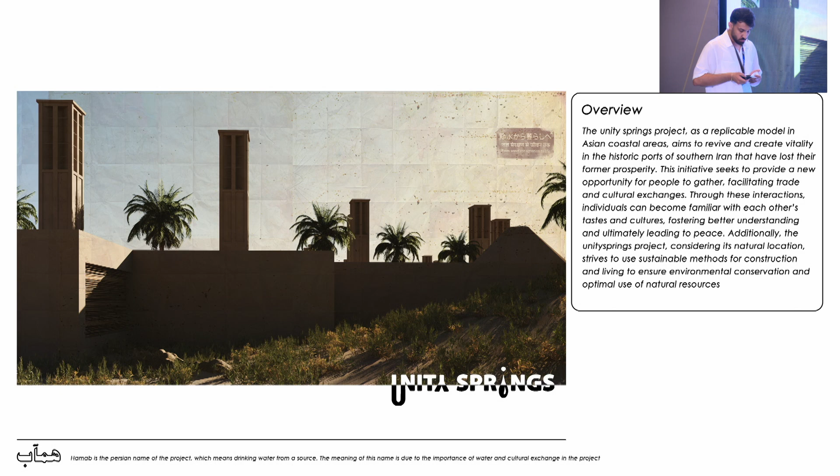The first part of my project: let's consider the issues, the story of the area, and the marine communication and concepts. In the past, roads had an important role in the exchange of culture. In this project, I will talk about marine communication and how it used the spice road.

This project is located between two historical port cities dating back to 3,000 years ago, Kong and Lenge, in south of Iran. In fact, our limited design is attached to Kong port.

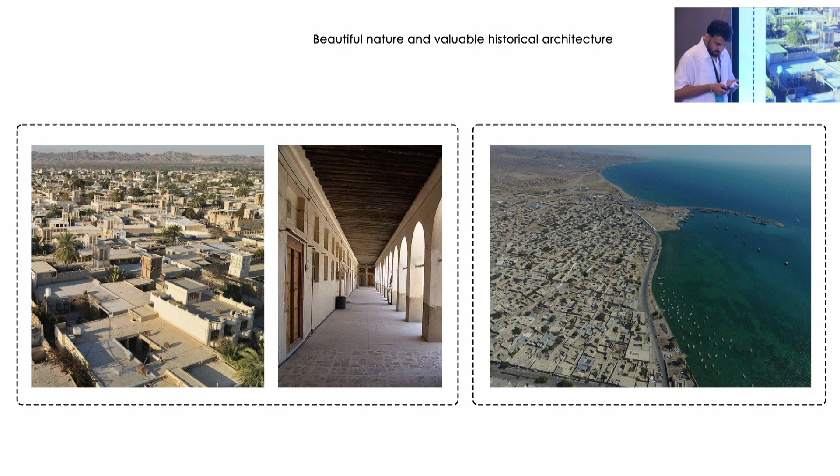In the city of Kong, there is a beautiful nature and unique historical architecture, especially in the field of sustainable methods. In the Kong port, there was a trip named Gap.

This is a Persian name, and this trip was taken by sailors on the spice road. This trip has had many effects on the culture, art, food, and literature of some countries that have been on the path of this trip.

The countries include Iran, India, Arab lands, and some parts of Africa. For instance, the spice taken from India affected the food and taste of other areas, and marriages between nations such as Iranian and Zanzibar people and Indians in south of Iran took place in many cases to exchange culture and traditions.

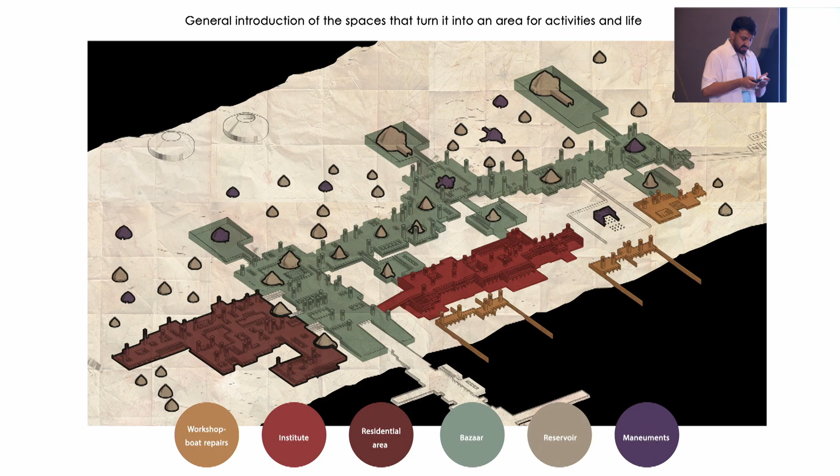In this part, I will describe all the spaces in this project. In this form, each space is indicated separately, and these spaces include specific uses such as bazaar, living space, reservoirs, institute, and workshops.

This is the overall view of my project, and here I'm going to explain each part.

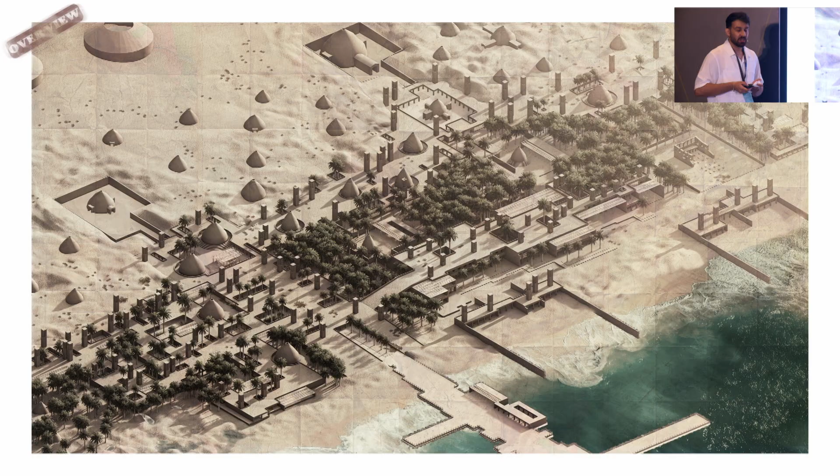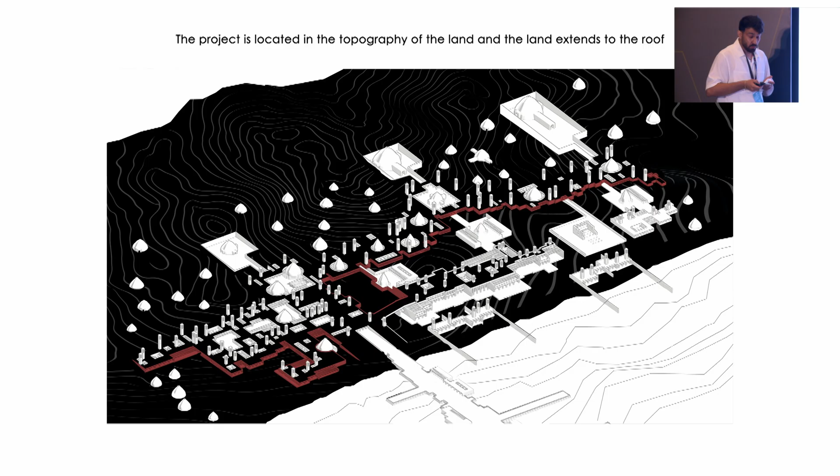The project is located in natural topography, and the ground on the roofs is developed, fading into this.

In these pictures, you can see the marvelous southern coast of Iran, where desert meets the beach. Topographically, this plan helped restore the natural view and improve energy efficiency.

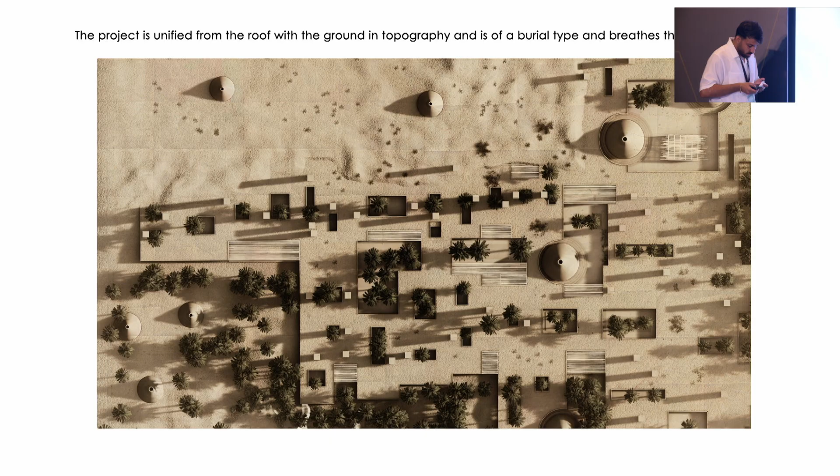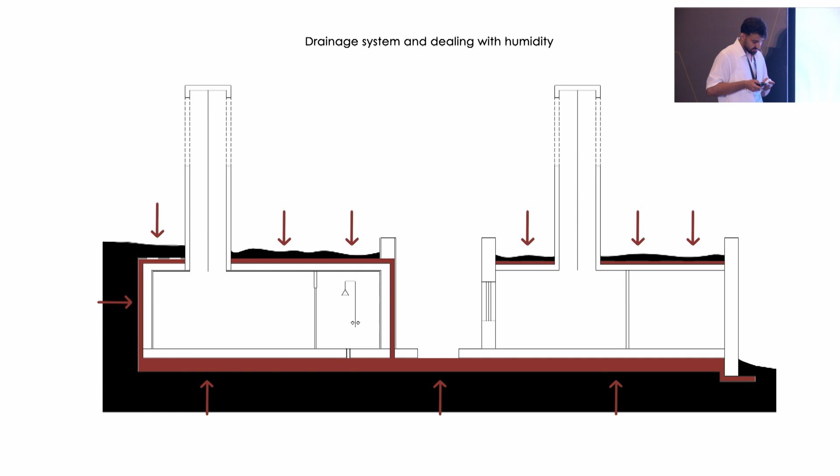This is a top view of this part, showing how the project is faded. The outer layer of the project is secured with a drainage system. Here are some outdoor perspectives.

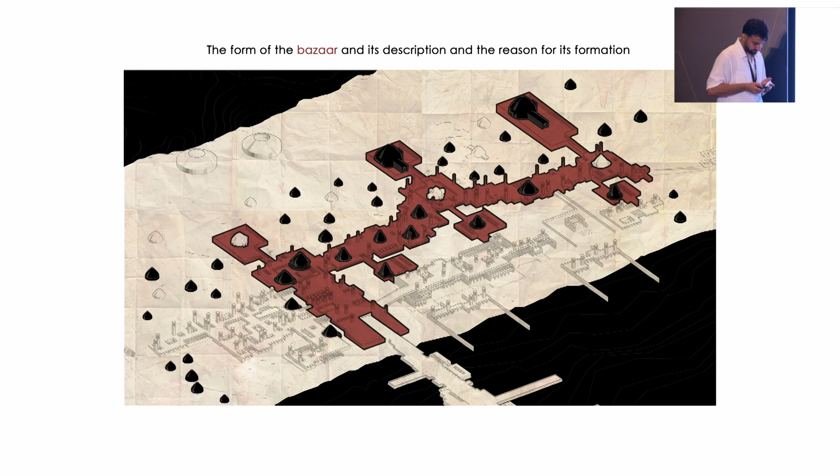The marked area shows the bazaar. Originally, first we will examine the reason for the formation of this pattern.

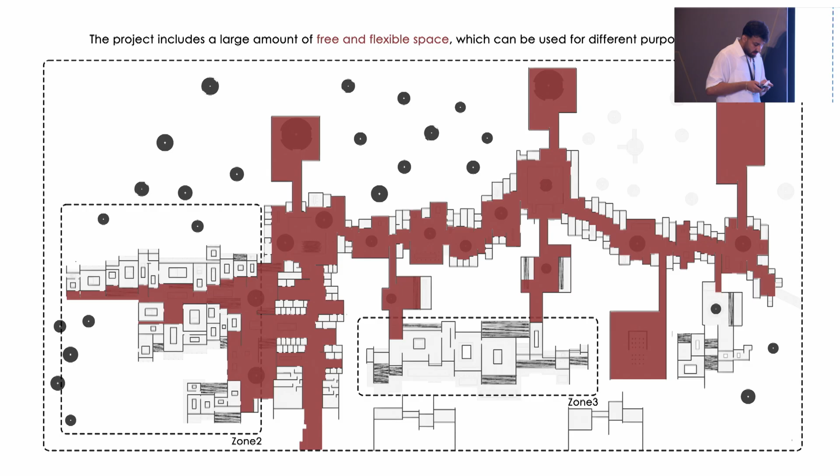Today, the bazaar in Lengeh port has been destroyed due to loss of connection with the sea by the new beach road. As you can see, there are a lot of free spaces in the bazaar area. This is a view of open spaces inside the bazaar.

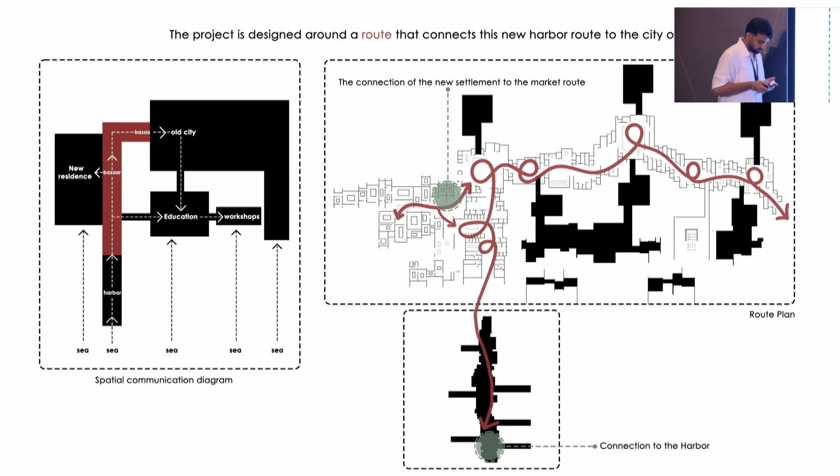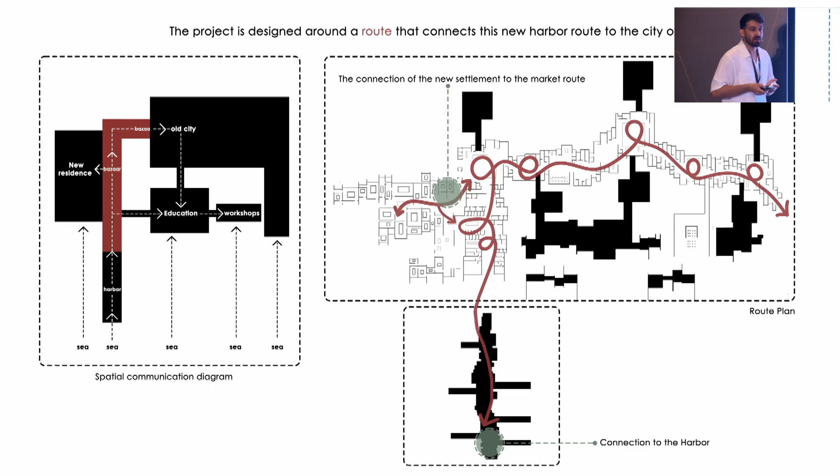The whole space is designed around the path. It's a pattern that includes the old pattern of Iranian bazaars and has a deep connection with the sea in my project.

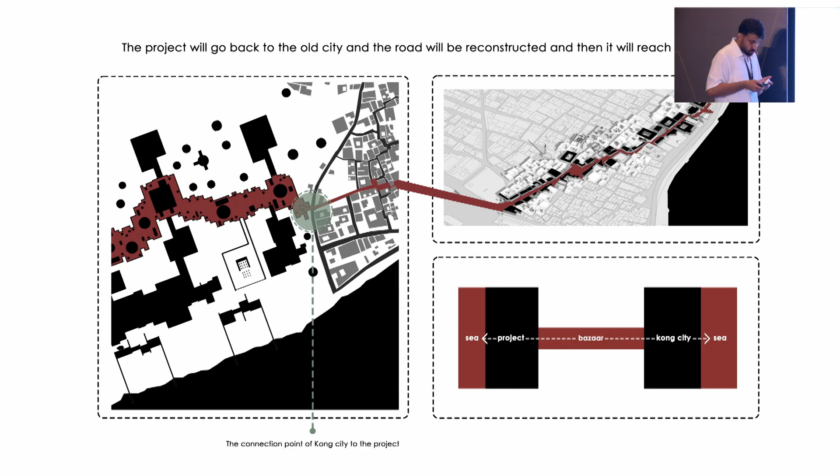The bazaar is also a connecting factor with a route to Kong City. The shops and contacts of people can be seen in most parts of the project.

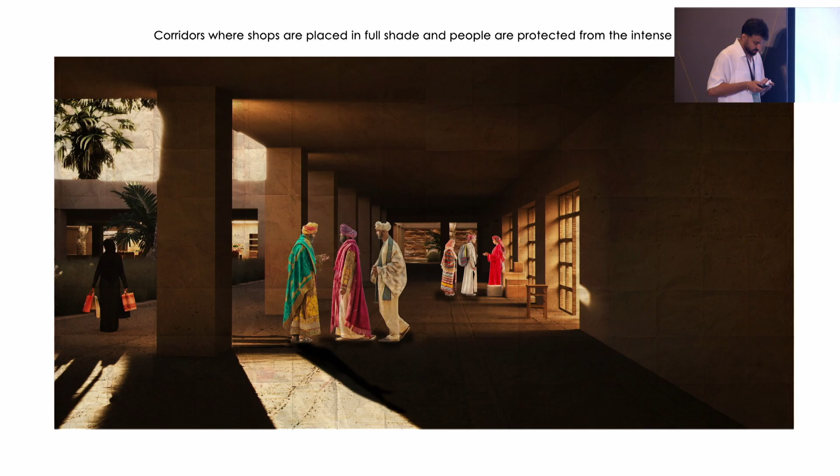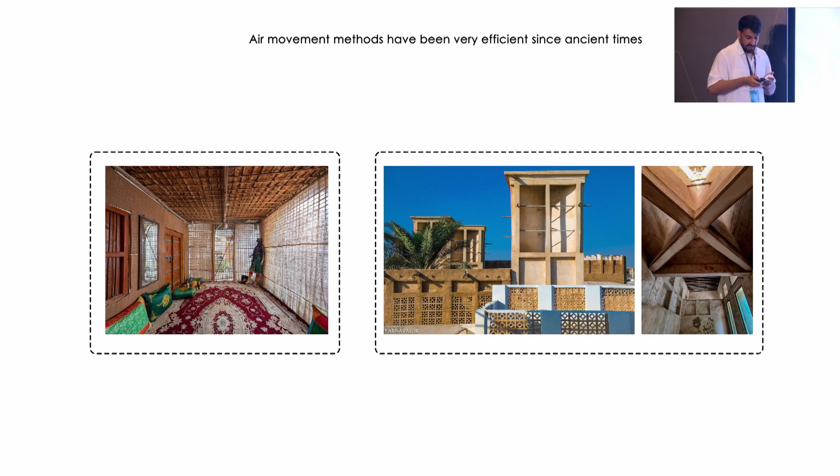This pass is located in shadow due to extreme hot weather conditions. The solutions you saw were also used in old days, and people could survive in the hard climates of this region by using these methods. In the past, wind catchers had a significant structure, and in this project the same structure has been used accompanied with

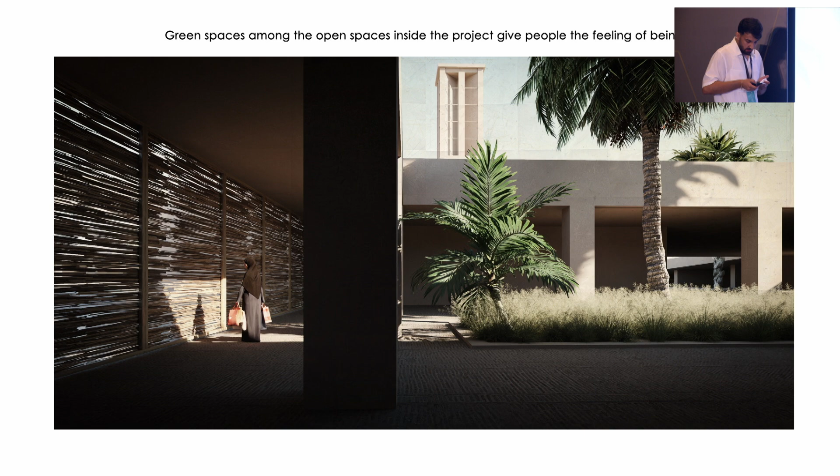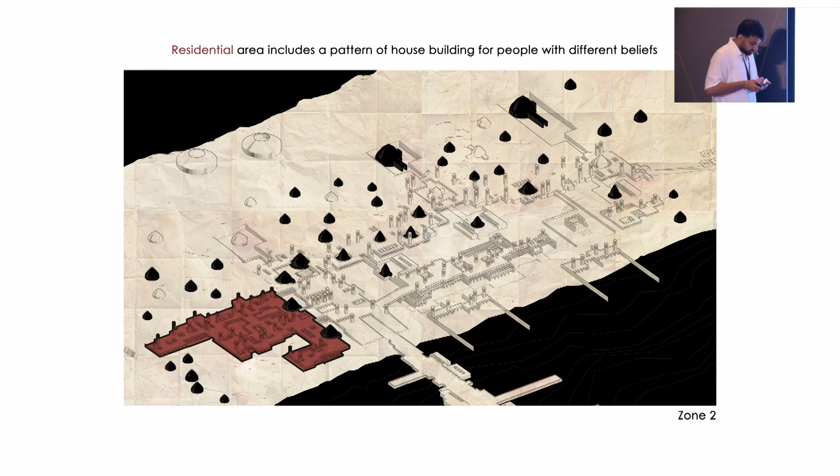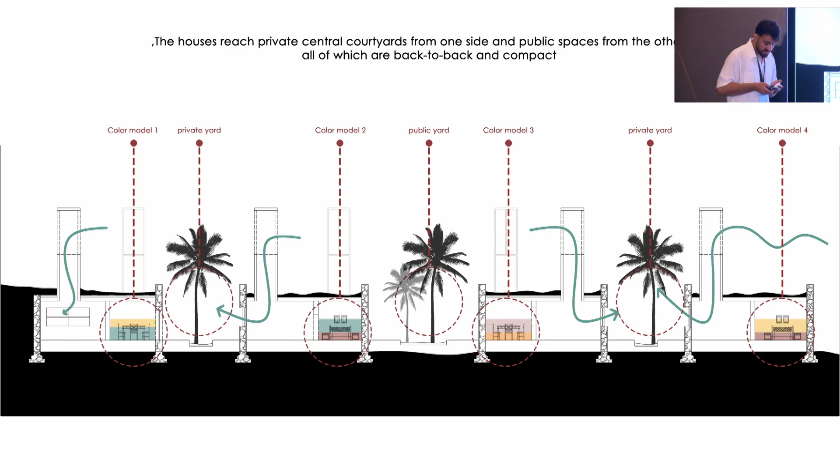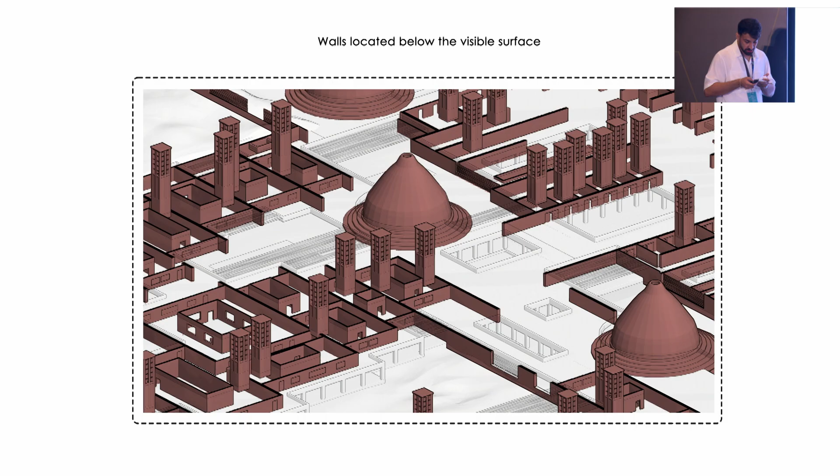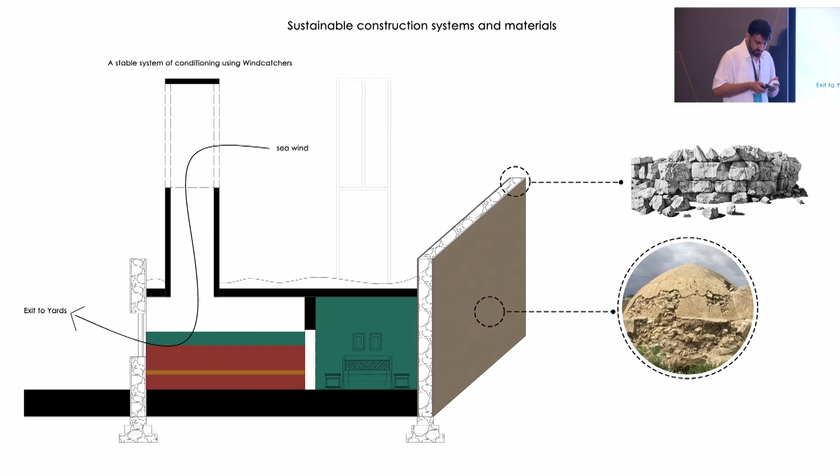The residential area, and it's a view of this part. In this diagram, you can see how houses are placed together and their connection to public spaces. You can see a large amount of walls under the roofs, which acts like a buried city. We can see how efficient walls were made from mud and stone, which is a local and inexpensive method.

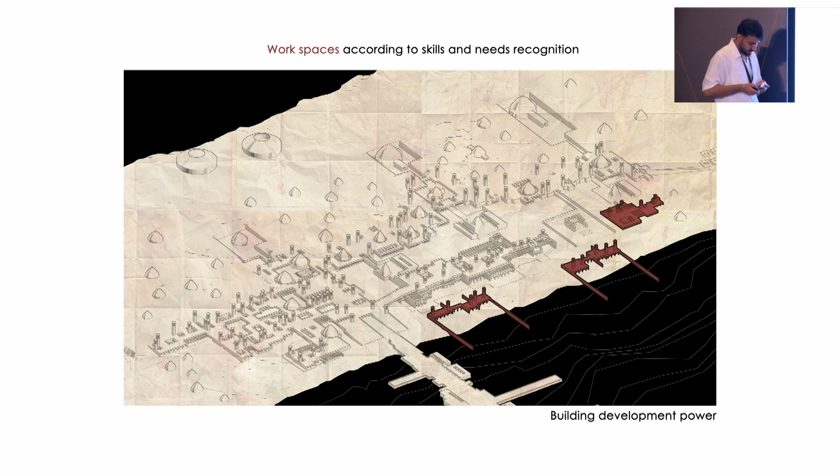The marked area shows carpentry and boat making, because local people are skillful in making wooden handcrafts and boats.

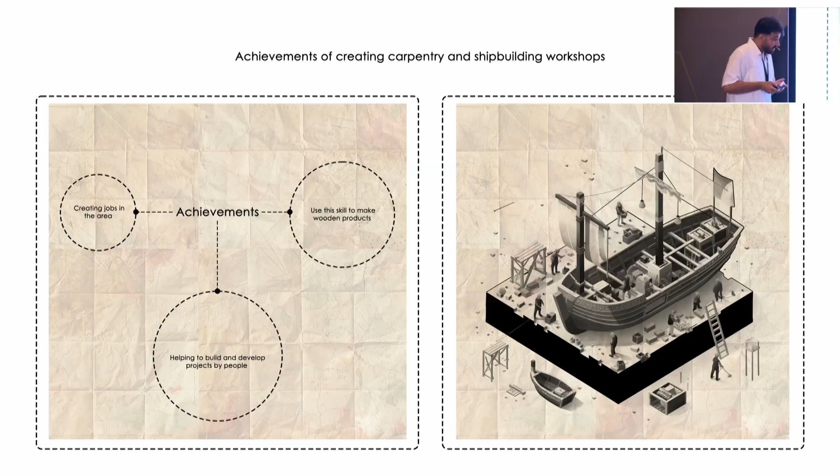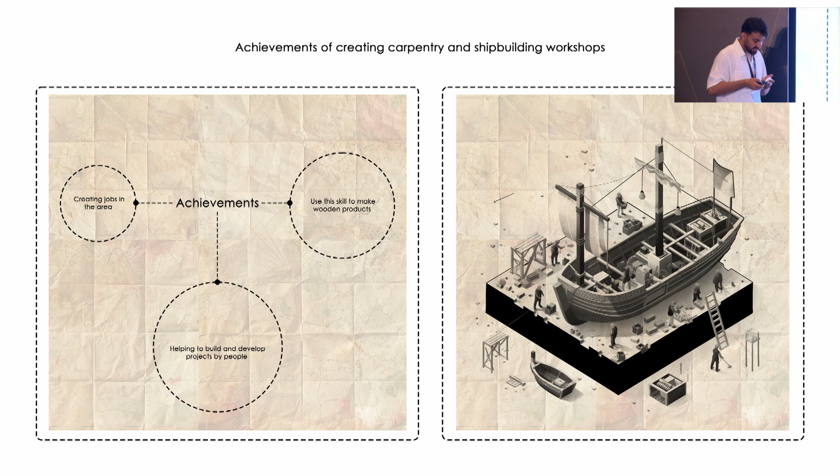The work gives the project opportunity to gain experience better and development of the city according to the skills of people and the available products.

The research institute in the project gives people the opportunity to learn and teach each other about culture and language. This can always lead to growth of a region.

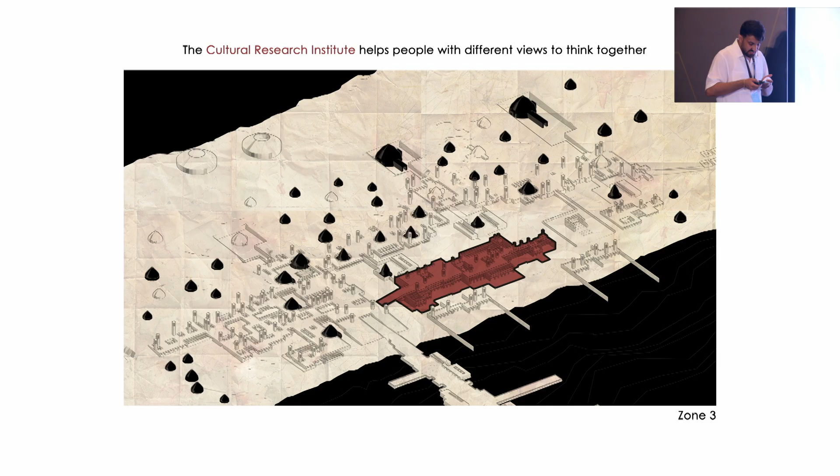The marked area shows the educational region, and again, creating the opportunity to learn together can create many shared experiences.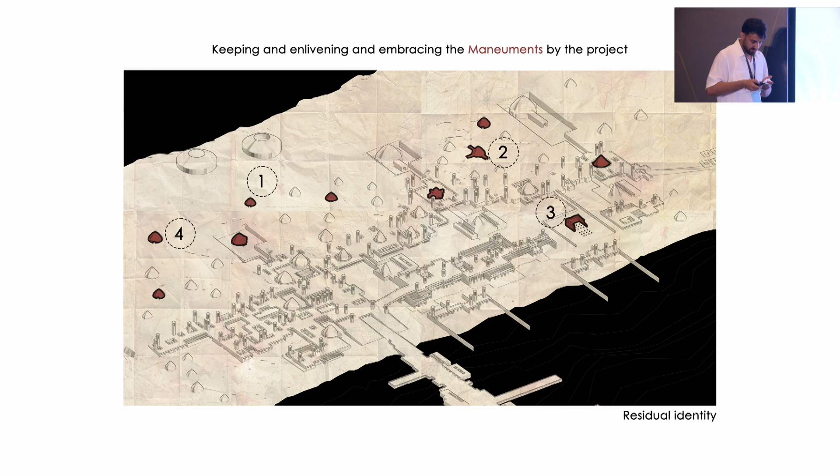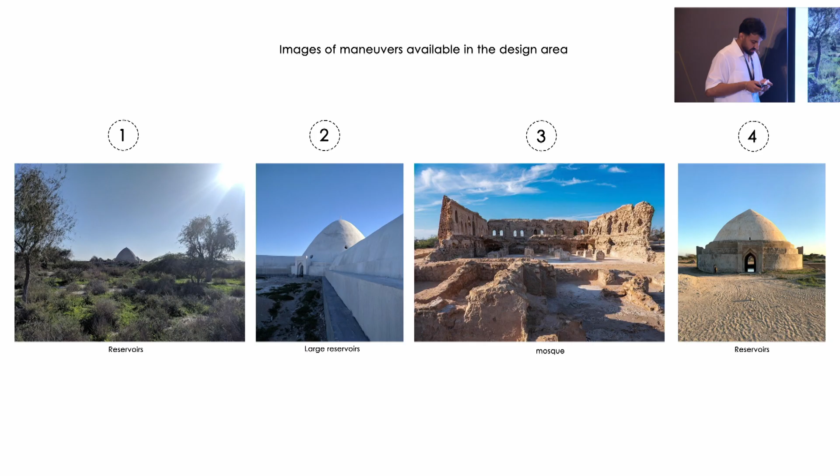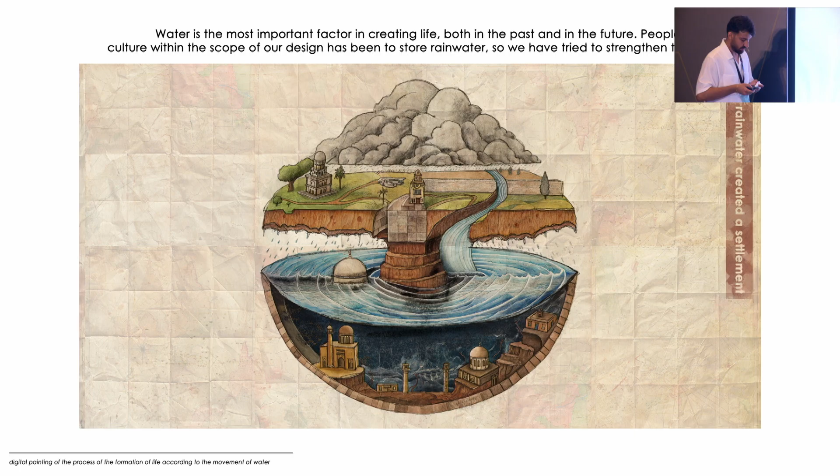And this is my abstract digital painting, showing how water gives life to a dry area, which is the source of my brainstorming. And the next part,

critical water conditions, especially in the Middle East, are considered a potential danger for human societies. For instance, some areas in Iran have constant battles and arguments over water in some central areas and borders of Iran. In this section, I will talk about opportunity.

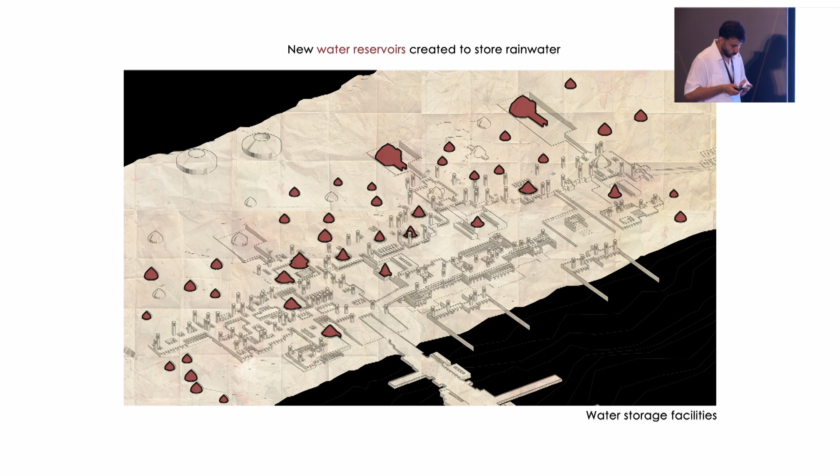I had to create a new system by looking at the old version. This plan shows the location of the levee and overflow canals, and the two levels that the reservoirs sit on.

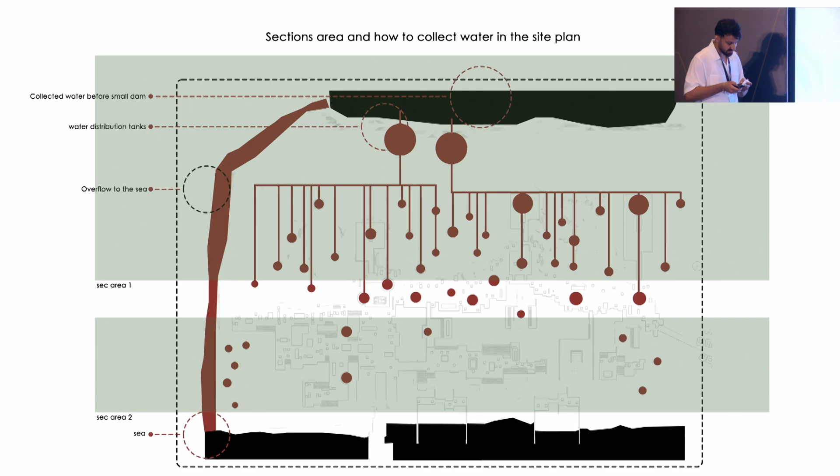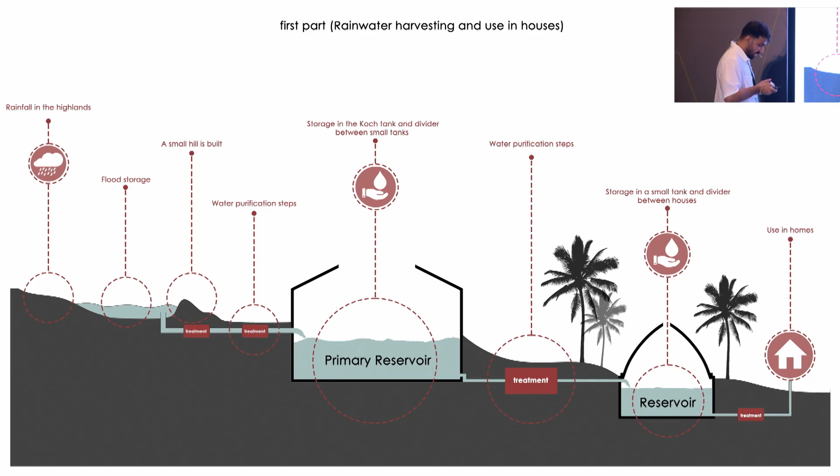At first, the flood and rainwater in the area is collected by the levee, which is a small dam, and then conducted to the reservoirs, saved for use in the homes.

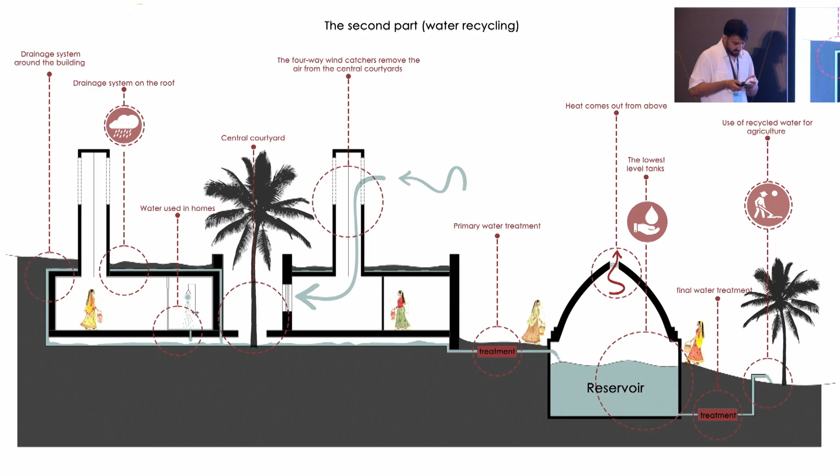In the next stage, the wastewater is refined and transferred to water reservoirs located at a lower level, then used for agriculture. The whole process is administered by hygiene pipes.

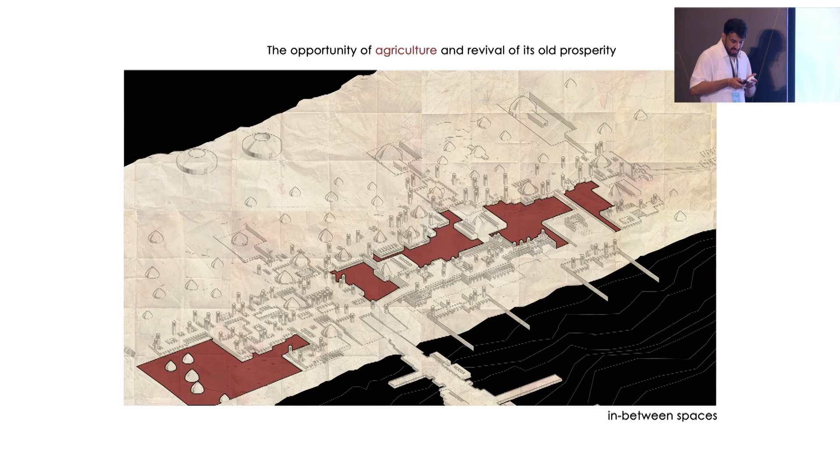And now, this process of water can make the area greener than before and create agriculture opportunities in between spaces.

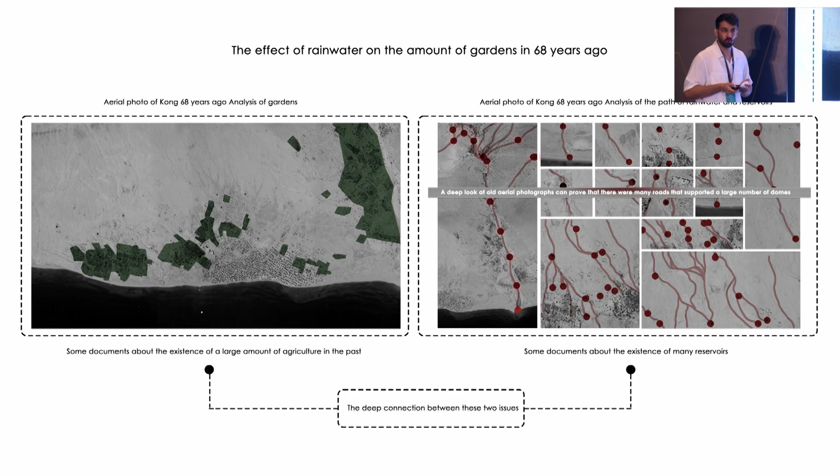As a result, as can be seen, in the past there was a large amount of green space due to extensive storage of rainwater, which has disappeared today. This picture and document is from 68 years ago.

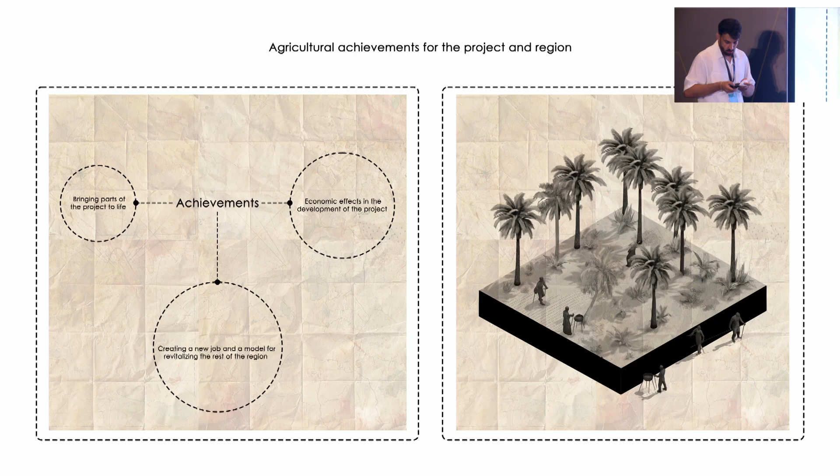Also, agriculture and living together in a dry space can create a common goal for the people, and there are many yards so that the project can breathe better.

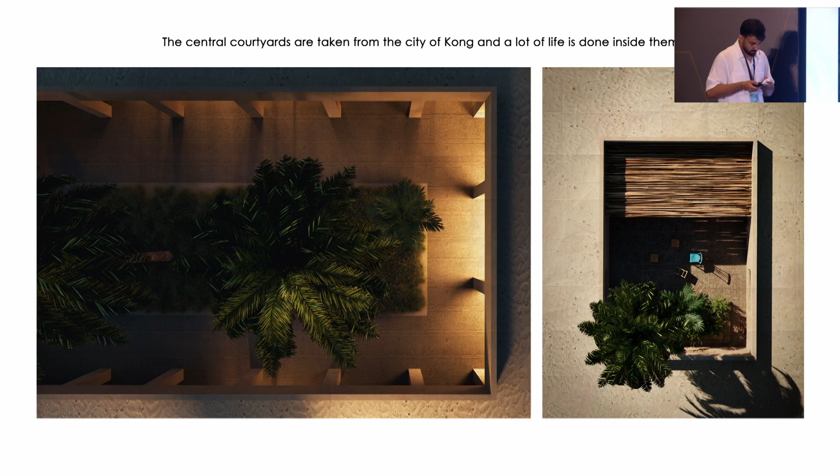Our patterns are inspired from the patterns of old houses in the Kong. As you can see in this picture, yards have played a very important role in everyday life.

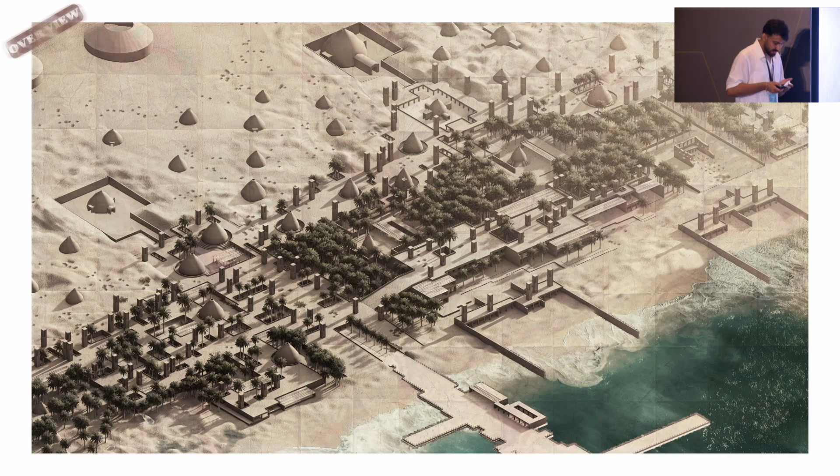We can see the overall view of the project again, and I tried to make a project with this appearance, with all strategies. In the final session, with the realizing of these plans, the project will be self-sufficient, and the project lies at the heart of a process including production, education, culture exchange, and sales.

Like springs that boil from one point, it can form a great union, and it can be applicable in other areas through different architecture and design.

And I hope the project can create a multinational society, and I hope this project will provide a chance to bring people together in happy and peaceful conditions.

Our project tried to revive the relationship between nations on the Spice Road through the culture of sailing.